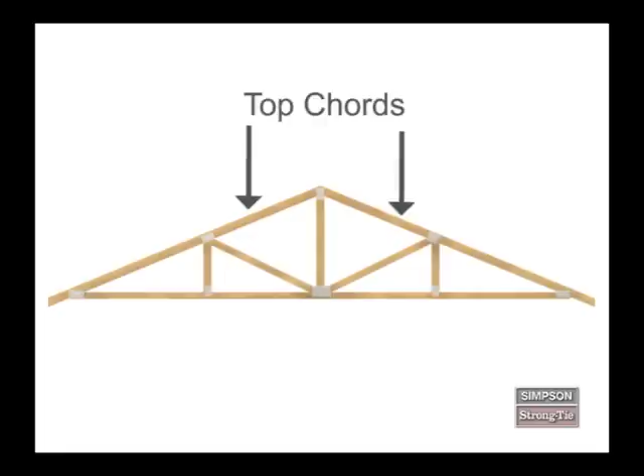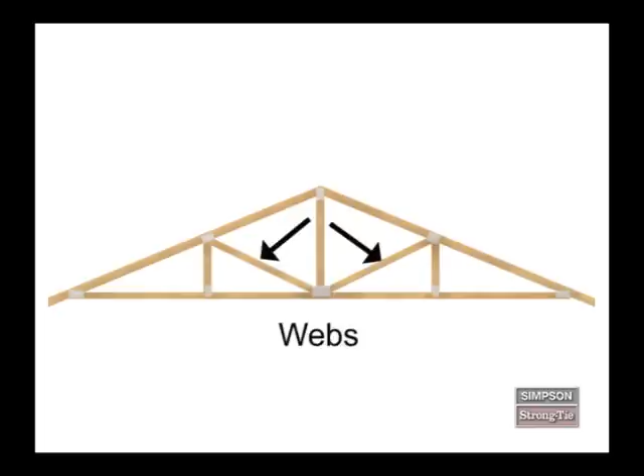A metal plate connected wood truss is an engineered pre-built component that functions as a structural support member in a house. Let's look at the parts that make up a truss. The primary parts of a truss are called chords and webs. Chords are the perimeter members of a truss. The top chord is an inclined or horizontal member that establishes the top of the truss. The bottom chord is an inclined or horizontal member that establishes the bottom of the truss. Webs are members that join top and bottom chords. Toothed metal connector plates tie a truss's webs to its chords.

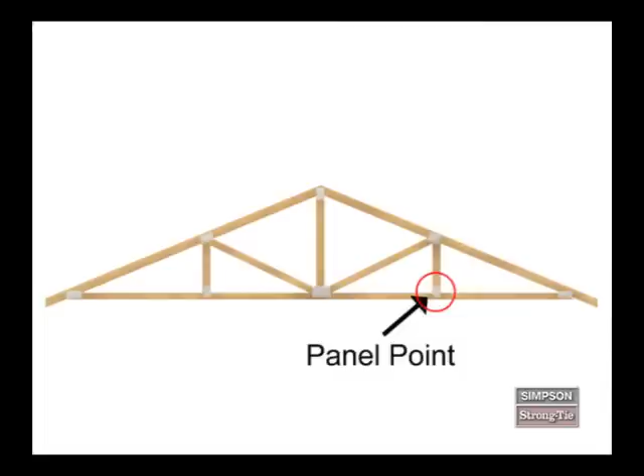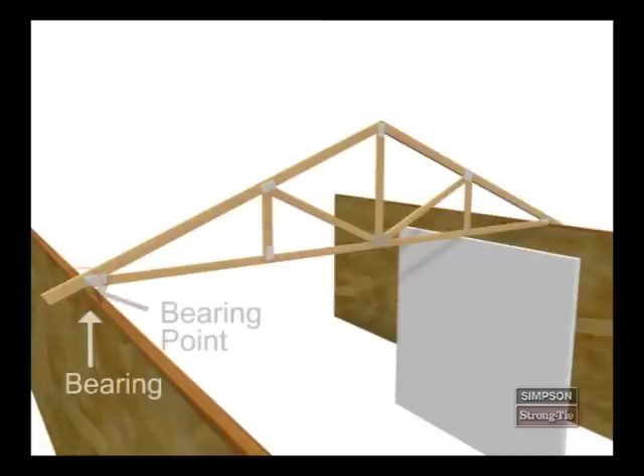There are different names to describe where truss members intersect. For example, the place where a web meets a chord is called a panel point. The place where a top chord intersects with a bottom chord is called a heel. A bearing is a load-bearing wall or beam that carries truss loads to the foundation of the structure. Where a truss intersects with a bearing is called a bearing point. Note that structures also have non-load-bearing walls, which are called partitions.

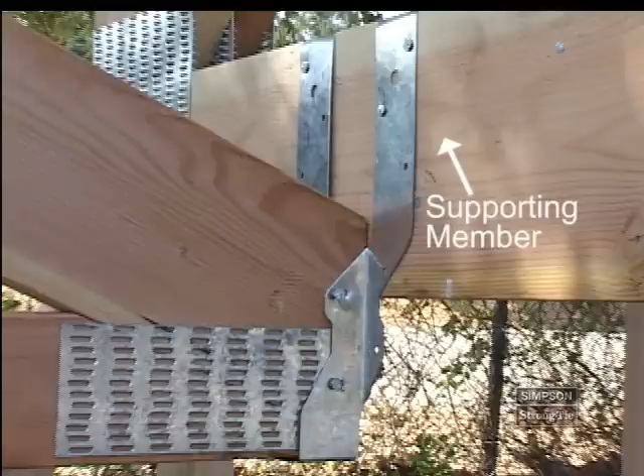There are two types of truss bracing, temporary and permanent. Temporary bracing holds trusses in plane until permanent bracing is put in place. Permanent bracing stabilizes trusses throughout the life of a structure. We will refer to truss members as either supporting or supported. A truss member with a hanger attached to it is a supporting member. A truss member that you install into a truss hanger is a supported member.

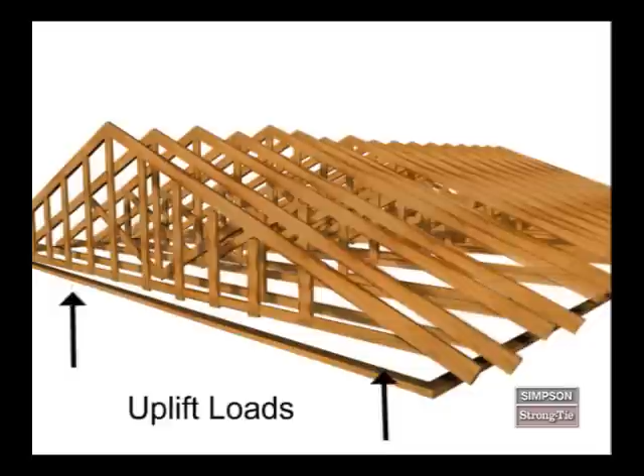Trusses are designed to resist many types of loads. Lateral loads are forces that push on a structure. Uplift loads are forces that try to lift the truss away from its bearing points. Now that you're familiar with basic truss terms, let's look at some common truss types.

A variety of truss types are used in construction all throughout the country to build floors and roofs. You should be able to identify the common trusses that we are about to review because it's important for correct product installations. A girder truss is usually made of multiple trusses, which are fastened together to act as one truss. A girder truss carries heavy loads from structural members that are framed into it.

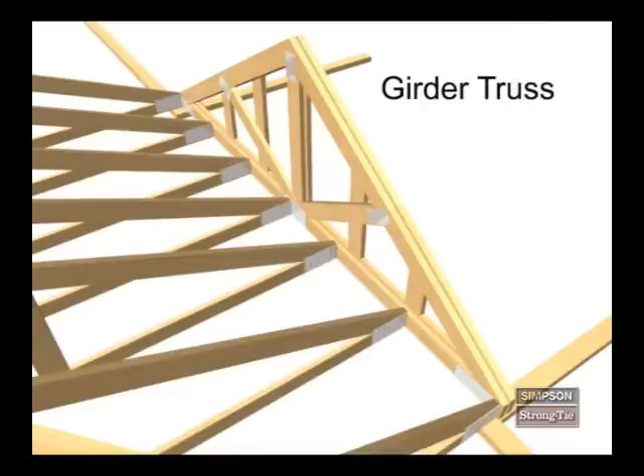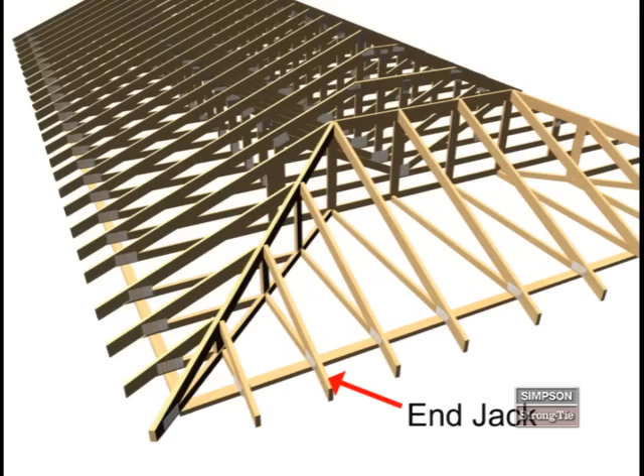In symmetrical hip-set roofs, a hip jack is installed at a 45-degree angle from the corner of a structure to the hip girder. I'll refer to the hip jack simply as the hip later on in the video. An end jack extends from the end of the building to the hip girder or hip jack. We will refer to the end jack as the jack later on in the video. A valley truss sits on top of other trusses. It's used in construction to change the direction of roof planes or to connect diverging roof planes.

A gable end has a triangular-shaped frame. It's used in construction to complete the end wall of a building and has vertical members that support the sheathing and resist wind. Now you're familiar with some common truss types that you may see as we learn how to install Simpson truss hangers.

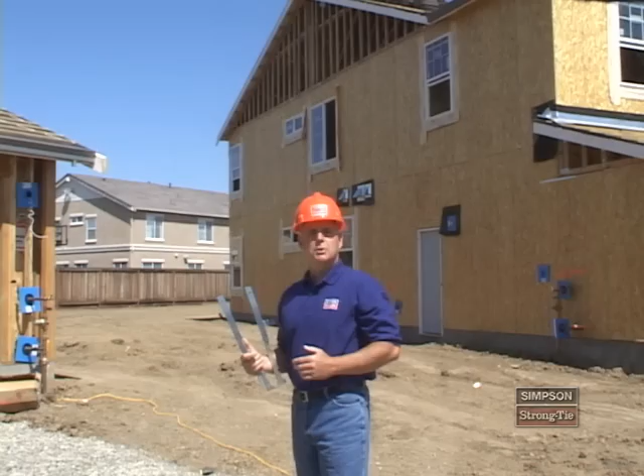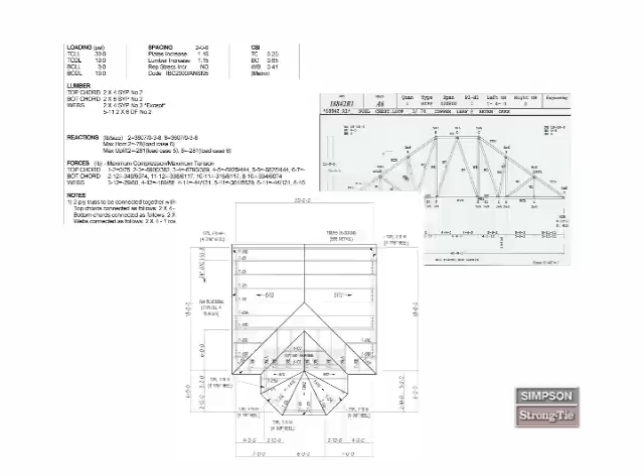It's an engineer's or truss designer's job to specify truss hangers, but it's your job to install the truss hangers that they specify correctly and in the right places. Before you begin installing any trusses, verify that all the specified hangers were delivered to the job site. Hanger specifications are usually located in one of three places: on a truss placement plan, in the structural design document's fastener schedule, or on the individual truss design drawings.

The erection of wood trusses is dangerous and requires careful and proper installation methods. The Building Component Safety Information booklet and summary sheets provide guidelines for the safe handling and installation of trusses and temporary bracing. Please take some time to become familiar with these resources. In just a few moments, I'll show you how to install Simpson Strong-Tie truss hangers. However, let's first look at the hangers themselves.

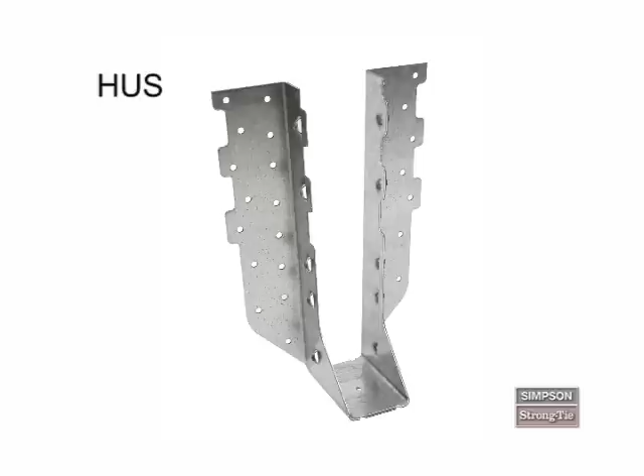The HUS is a face mount hanger that has the dome nailing feature to guide nails at a 45-degree angle. Like the HUS, the HTU is also a face mount, but it doesn't have dome nailing. It has straight nailing, but otherwise installs just like the HUS.

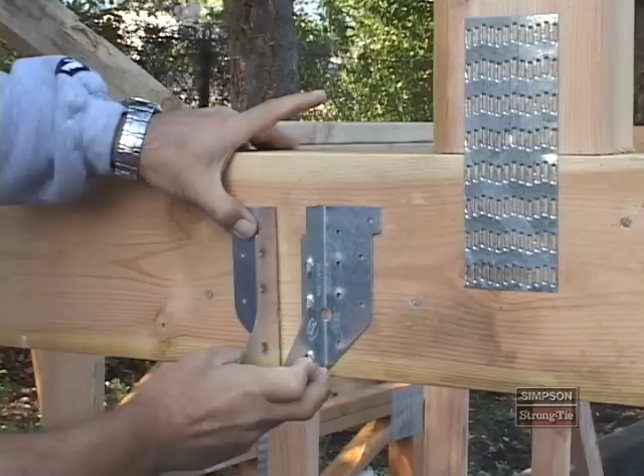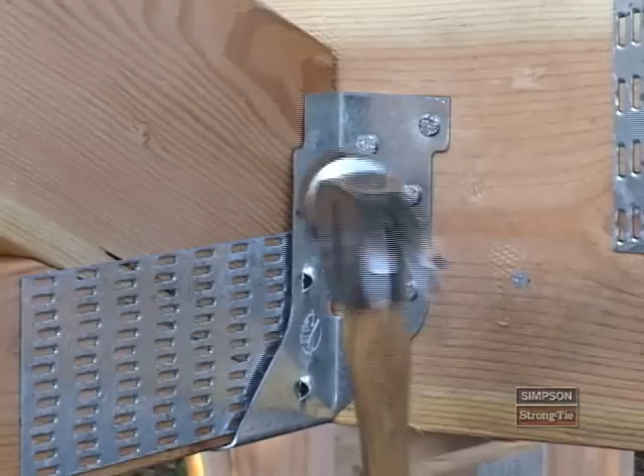To install, place the hanger on the supporting truss and install the required nails through the side flange nail holes into the supporting truss. Then, place the supported truss in the hanger and install the required nails through the domes so that they enter the supported truss at a 45-degree angle. This is what the HUS looks like when it's installed correctly.

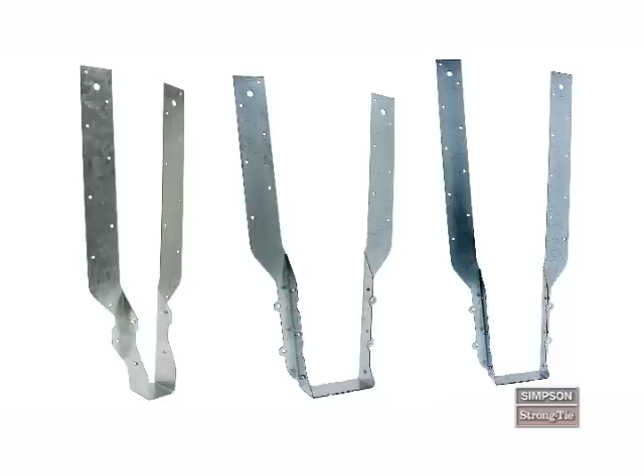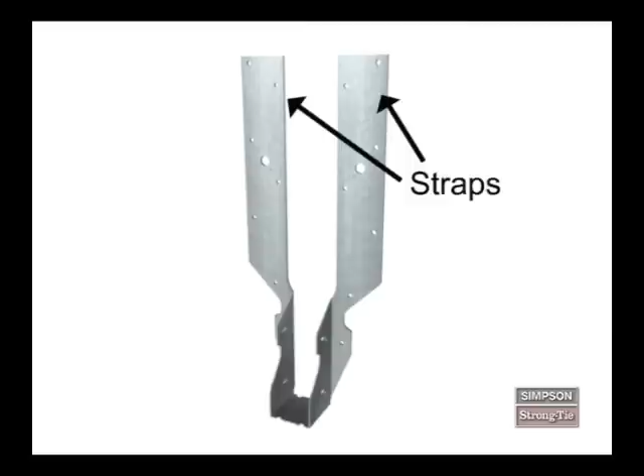Adjustable truss hangers have long straps, similar to the flanges on typical face mount and top flange hangers. These hangers are called adjustable because you can field form the straps to create top flanges, which will give you the installation benefits of a top flange hanger. All THA series hangers have straps and side plates. It's important for you to recognize these parts because I'll refer to them as I explain the installation processes. THA series hangers have two different installation methods: maximum and minimum nailing.

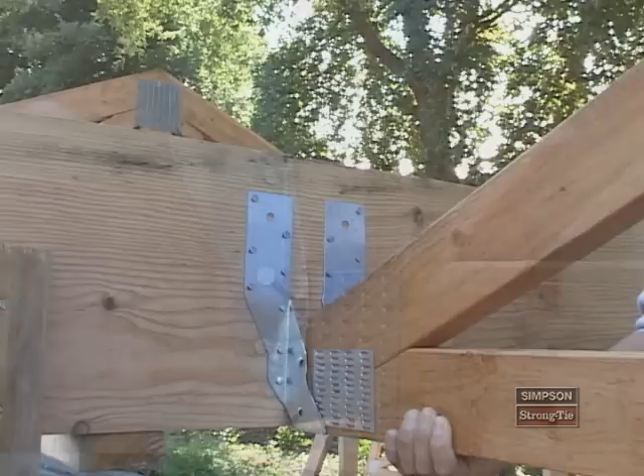The maximum nailing method is similar to the installation process for a typical face mount hanger. After you position the hanger, drive the appropriate nails through the strap nail holes and into the supporting member. Then place the truss in the hanger and drive the appropriate nails through the side plate nail holes and into the truss. Note that the side plate nail holes are designed for double shear nailing.

Therefore, you have to drive the nails at a 45-degree angle so that they go through the corner of the truss and into the supporting member. Take a moment to review this complete, correct installation.

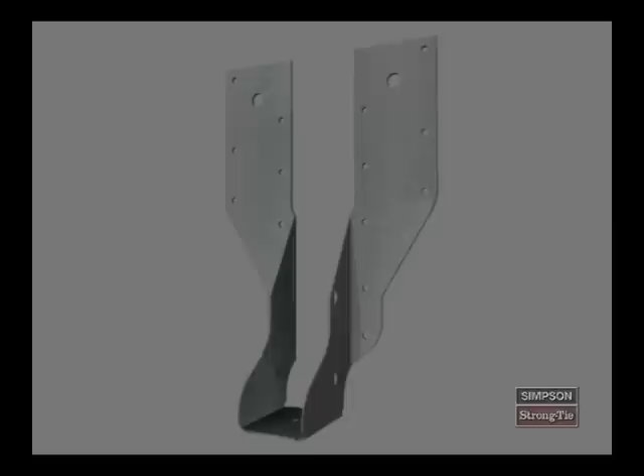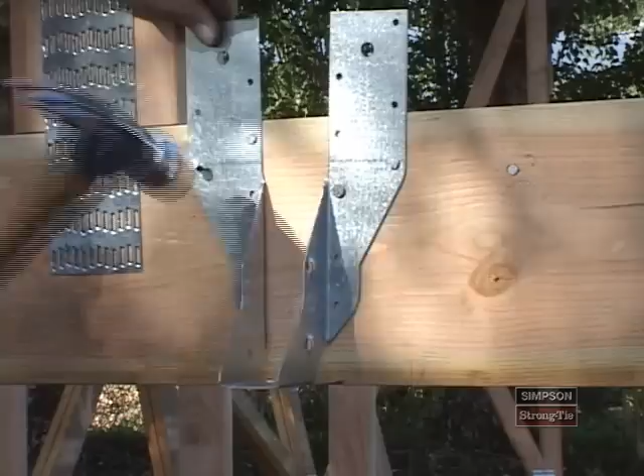Installation requires that you field form the straps over the supporting member. This makes the THA series hangers like a typical top flange hanger. Before you begin installing any THA series hanger using the minimum nailing method, you should know how many inches of strap must extend over the top of the supporting member. To secure the hanger, install at least 4 10D commons through the straps and into the face of the supporting member. Bend the straps over the top of the supporting member, then drive at least 2 10D commons through each strap and into the top of the supporting member.

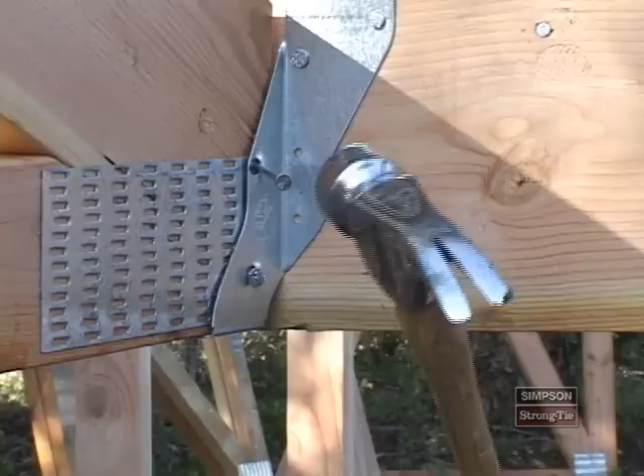The minimum nailing method for the THA-29 requires double shear nailing. You must drive 4 10D commons at an angle through the side plates so that they go through the truss and into the supporting member. Here is what a correct installation looks like.

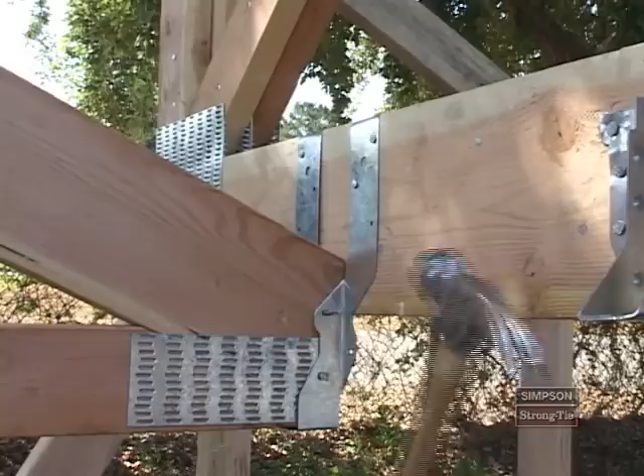Note that for all other THA models, the minimum nailing method doesn't require double shear nailing. When this is the case, you can easily straighten the double shear tabs and drive the nails straight into the truss. For single-ply trusses, use 4 10D by 1.5 nails. For 2-ply trusses, use 6 16D by 2.5 nails.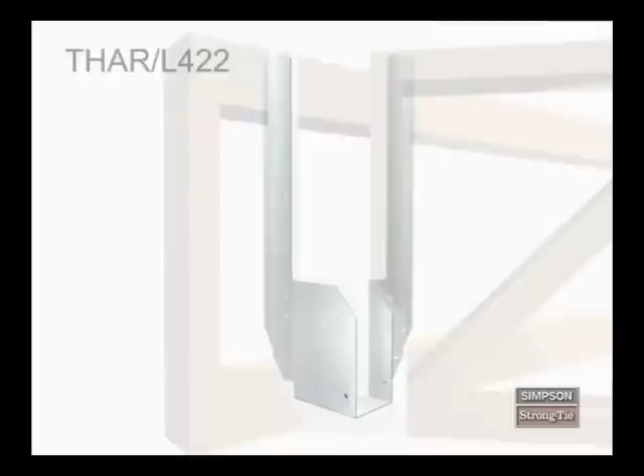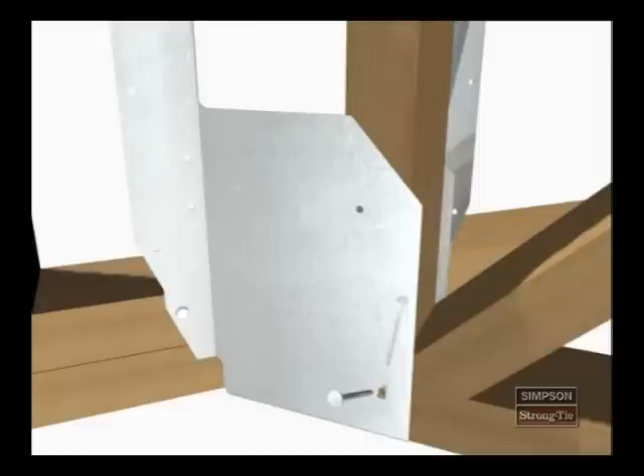The THAR/L 422 series of adjustable truss hangers is designed for the standard 45-degree floor truss installation. In both the maximum and minimum nailing configurations, you must field form the straps at least 2.5 inches over the supporting member. To finish this installation, drive 1 10D by 1.5 inch nail into each pan hole and 1 10D by 1.5 inch nail into the side plate.

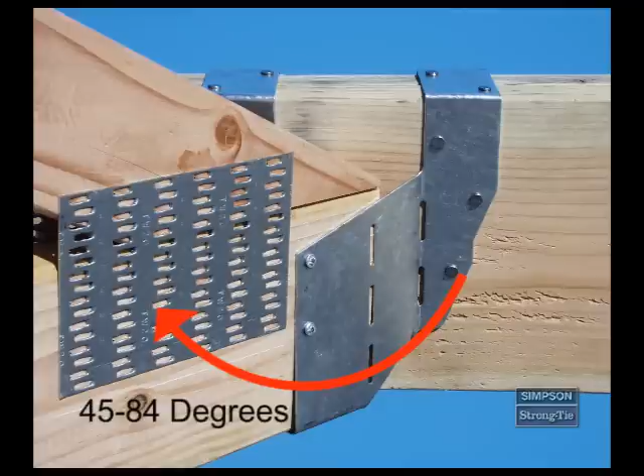The THASR/L series of adjustable hangers are designed to connect trusses that are severely skewed. These hangers can be field skewed between 45 and 84 degrees. There is a 4-step process for installing this product. Place the supported truss in the seat of the hanger. Align the back edge of the supported truss with the slotted holes in the side plates.

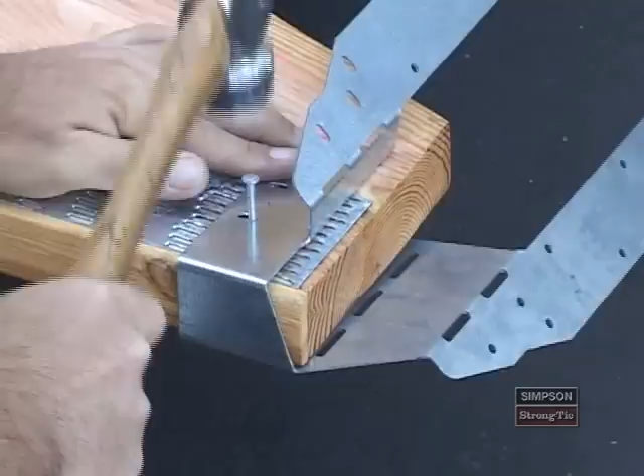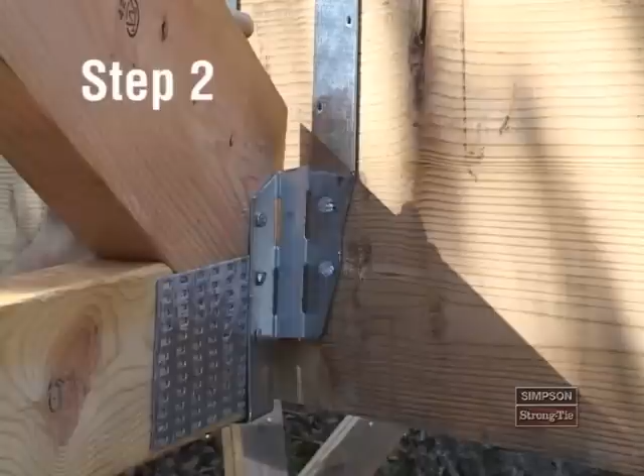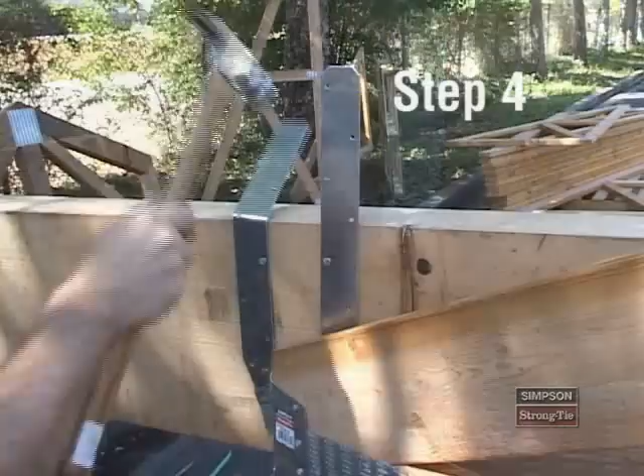Then drive 4 10D by 1.5 inch nails into the side plate nail holes to fasten the hanger to the truss. Install 10D nails into the header on the acute angle side of the hanger. Adjust the hanger to the desired angle. Bend the obtuse side of the hanger flush with the supporting member and install the face nails. Bend the strap over the top and install the rest of the required nails. Here's what a correct, complete installation looks like.

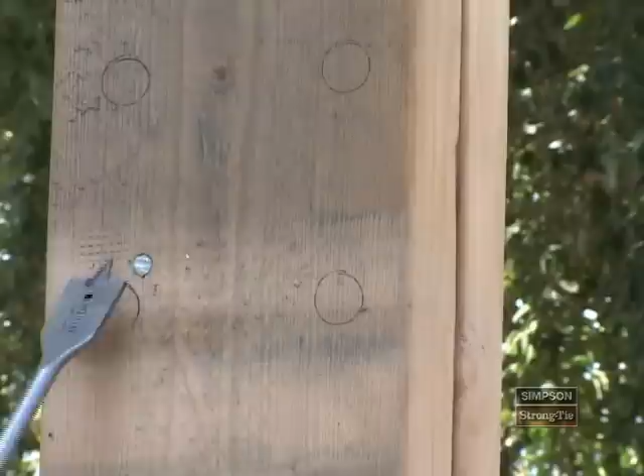Heavy truss hangers, part of the THG series, connect the supported truss to a vertical member of the supporting truss with bolts or SDS screws. To install a THG series hanger, place the hanger into position and mark the machine bolt locations, then drill the bolt holes. When bolts are required in the supported member for additional uplift, drill the holes using the same process that we just covered. Secure the THG to the supporting member using the bolts.

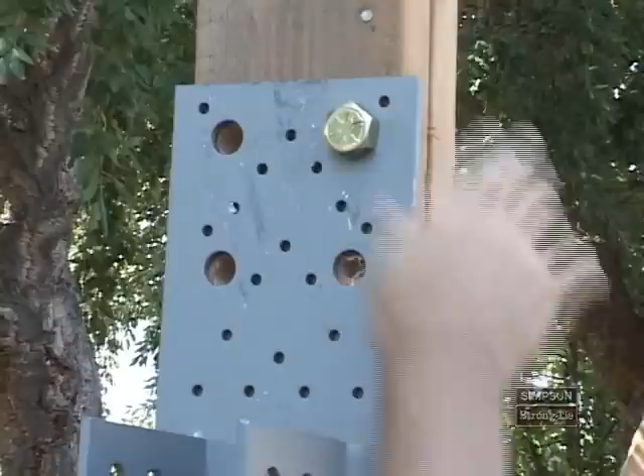Then place the supported truss in the hanger seat and install 10D commons through the side plate nail holes and into the supported truss. Take a moment to review this correct THG installation. Now let's complete this section on truss hanger installation by learning how to install multiple truss hangers.

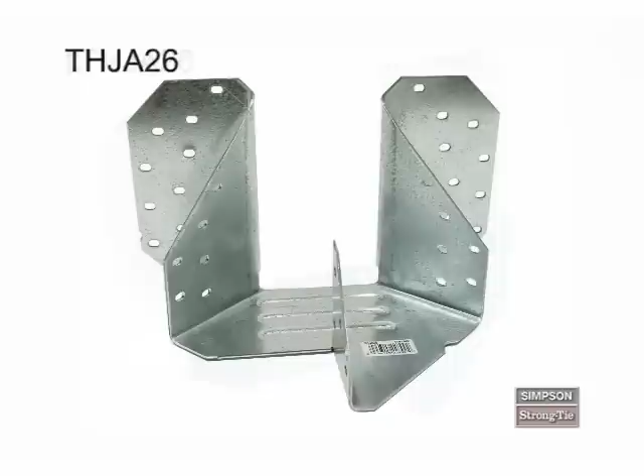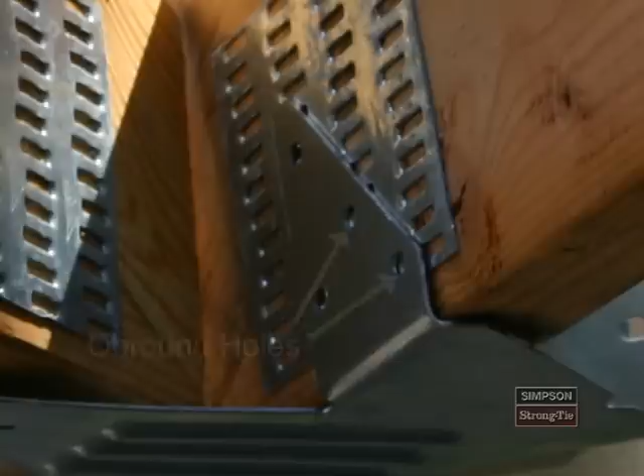Multiple truss hangers connect hips and/or jacks to girder trusses. Two common multiple member truss hangers are the LTHJA26 and the THJA26. Let's look at how to install the LTHJA26. The LTHJA26 has oblong or oval-shaped nail holes. Oblong holes make installation easier because you can drive nails through them at an angle.

The LTHJA26 series hangers have fastener holes located in the seat of the hanger and require installation of fasteners into the bottom of the hip members. To install, first position it on the supporting member. Then install 20 10D common nails into the face of the supporting member.

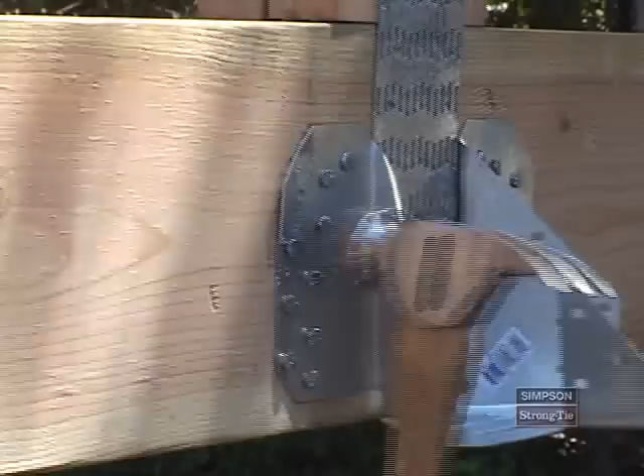Place 2 hips or a hip and jack into the LTHJA26 and fill all the nail holes with 10D by 1.5 inch nails. To finish this installation, install 1 10D by 1.5 inch nail through the seat of the hanger and into the bottom of the hip member. While correct hanger installation is critical to overall truss installation, bracing is equally important. Let's look now at bracing products and installation.

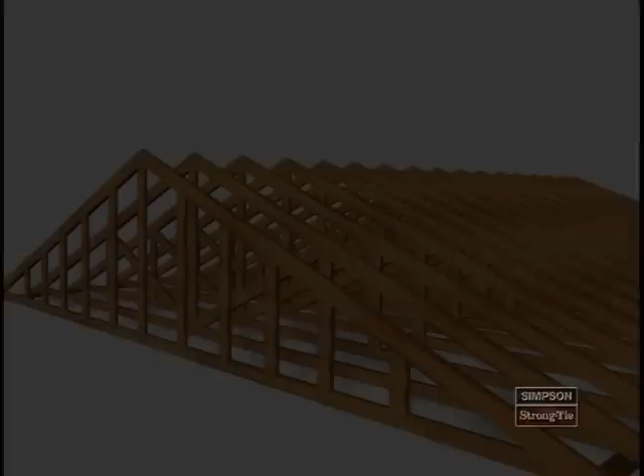When erecting trusses, temporary and permanent lateral and diagonal bracing is required. It is a building designer's or designer of record's responsibility to provide a permanent bracing plan. Lateral bracing is installed at right angles to chords and web members to provide stability, to help a truss resist lateral movement, and to prevent trusses from leaning and causing the domino effect. Bracing also prevents a truss from bending out of plane.

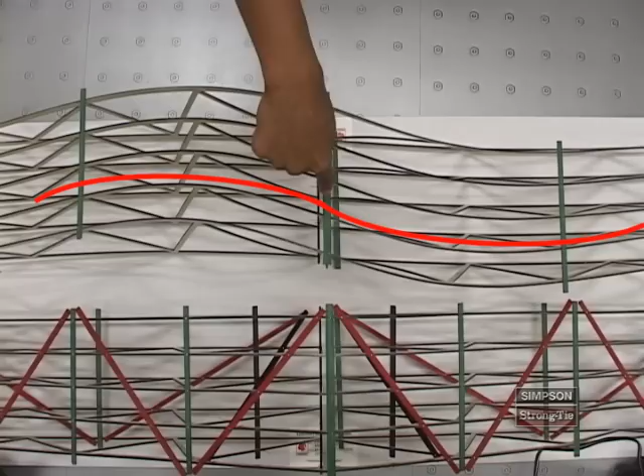The typical S-bend is a warning sign that trusses aren't properly braced. Even trusses that have lateral bracing can buckle in an S shape if there's no diagonal bracing. Therefore, lateral bracing requires additional stability from diagonal bracing. Now let's look at how to install two of Simpson Strong-Tie's bracing products, the TSB2-24 and the TBD20. Used properly, these products meet the requirements of BCSI for bracing trusses.

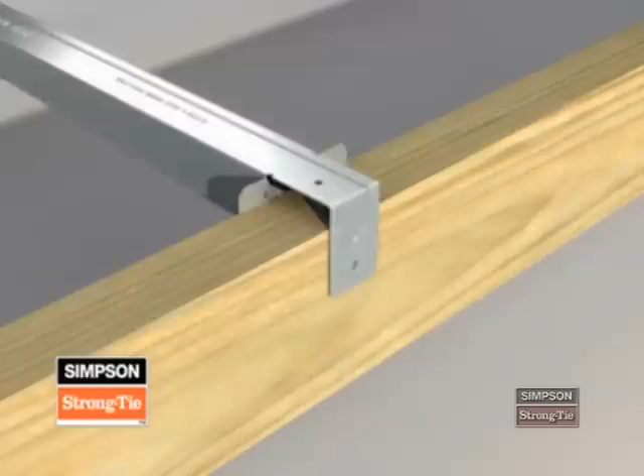You can use the TSB2-24 as lateral bracing for top chords, bottom chords, and web members. To install the TSB2, you will use only 10D by 1.5 inch nails. Start the installation by placing the brace on the top of the top chord or bottom chord. Next, secure the bracing by driving 2 nails through the 2 nail holes at each end of the brace.

If web members require permanent lateral bracing, the truss design drawings will indicate which webs to brace. Note that you can install the TSB on either side of the web members. Here's what the TSB2-24 looks like when it's correctly installed. Note that you don't need to remove the TSB2-24 before you install the permanent sheathing diaphragm. Its profile is low enough that you can sheathe over it.

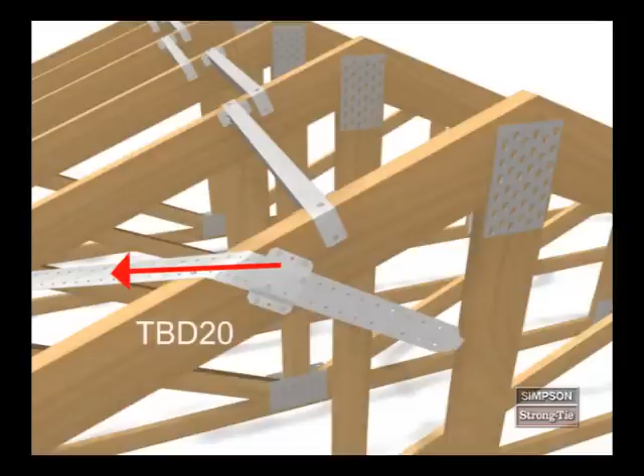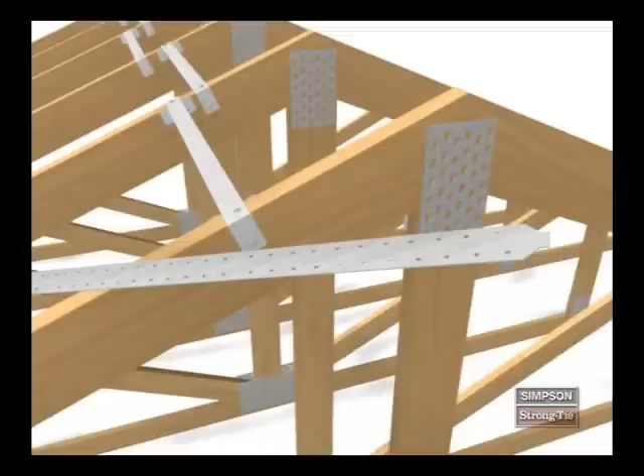The TBD-20 is a diagonal brace that safely transfers loads from the TSBs to the supporting structure. Note that the TBD-20 installation requires that you use only 10D by 1.5 inch nails. The TBD-20 is installed on a row of 5 trusses. To begin installation, determine where to secure the TBD-20 on the first truss. Hold one end of the strap next to a TSB on the top chord.

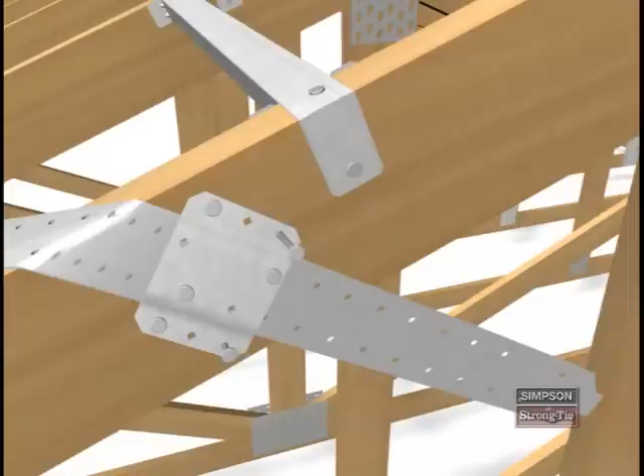Ensure that the strap is tight, and then install one nail through the bracing and into the top of each truss. Then insert one end of the strap through the clip. Secure it by installing 2 nails through the interior clip section and into the chord. Next, install a second strap clip on the side of the last truss using 4 nails in the exterior clip section, and secure it with 2 nails in the interior clip section. This completes the installation for a single brace.

You install the TBD-20 in an X configuration between parallel rows of TSB2-24s. Therefore, repeat the installation process in the opposite direction to form an X. Like the TSB, the TBD-20 has a low profile, so you don't have to remove it before applying the sheathing. This is what the TBD-20 looks like when it's installed. Now let's discuss some truss uplift connectors.

Uplift connectors resist forces that try to lift a truss away from its bearing points. Let's take a look at some of the Simpson uplift connectors and how to install them.

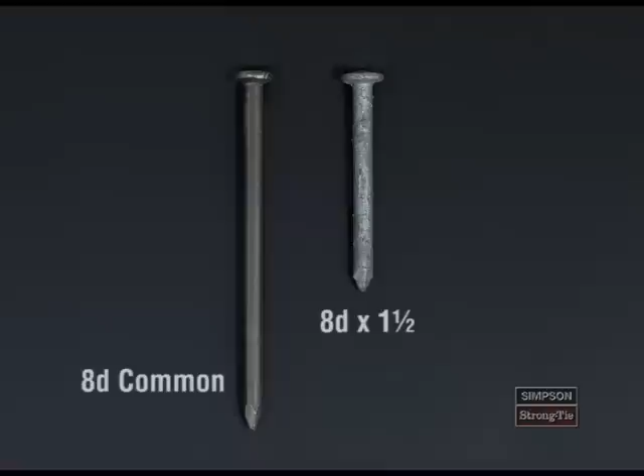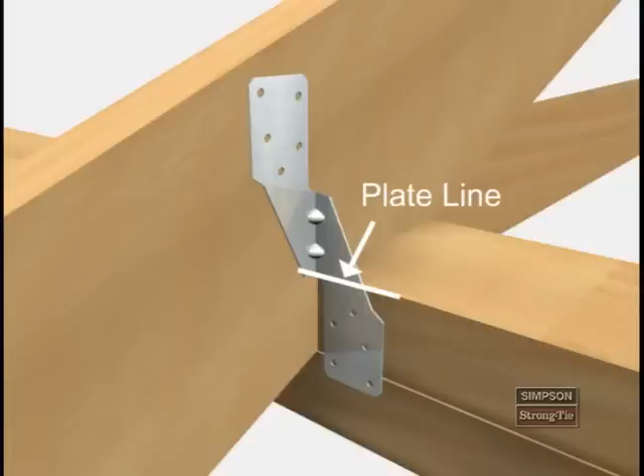The H2.5A is a symmetrical uplift connector. This series of truss connectors attaches to the sides of the truss. The H2.5A installation requires either 8d common or 8d x 1.5 inch nails. To install, align the plate line on the H2.5A with the top of the top plate. Secure the H2.5A by driving 5 nails into the top plate and 5 nails into the truss.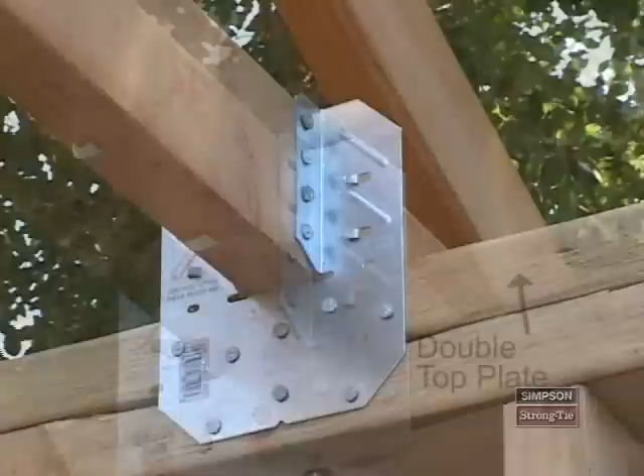The H10 and H14 series truss connectors encapsulate the truss much like a joist hanger. The H10 installation requires that you drive eight 8d x 1.5 inch nails into the plates and another eight 8d x 1.5 inch nails into the truss. You can install the H14 either to a double top plate or to a double 2x header.

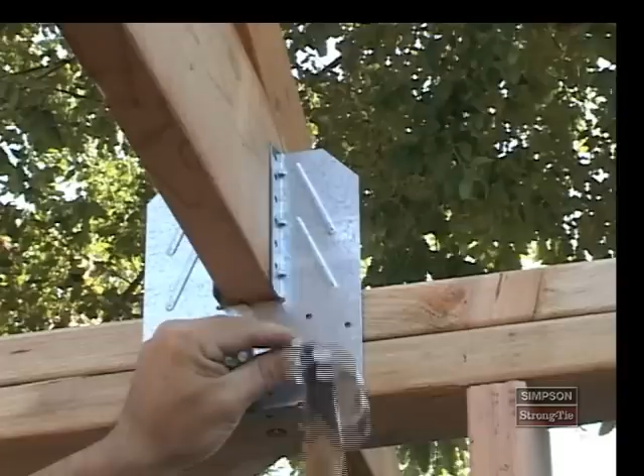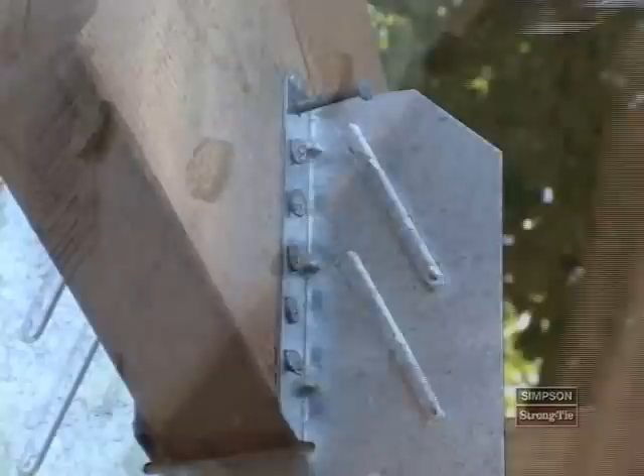To install the H14 to a double top plate, position the bottom flange tightly against the bottom of the double top plate. Then install twelve 8d common nails through the face of the H14 and into the double top plate. You must also drive one 8d common nail into the bottom flange. Finish the installation by driving twelve 8d x 1.5 inch nails into the truss.

To install the H14 to a double 2x header, first straighten the bottom flange. Then align the seat with the top of the 2x header. Next install the H14 by nailing fifteen 8d common nails into the header and another twelve 8d x 1.5 inch nails into the truss.

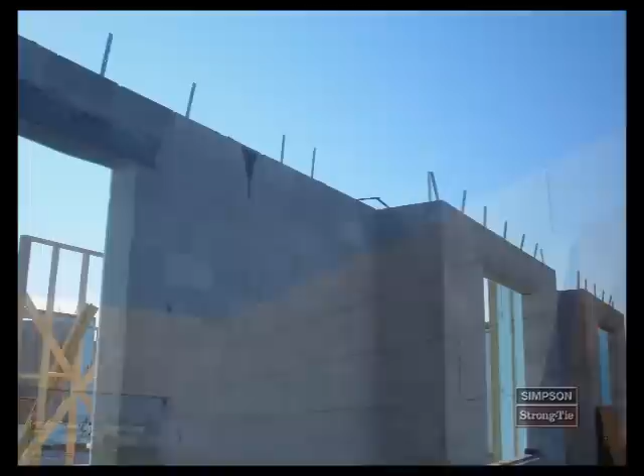If your walls are constructed using concrete or CMU material, embedded truss anchors like the META20 provide a simple solution for the difficult wood-to-masonry connection. After the grout is placed in the cells, insert the hook of the META20 into the grout until the embedment line makes contact with the grout.

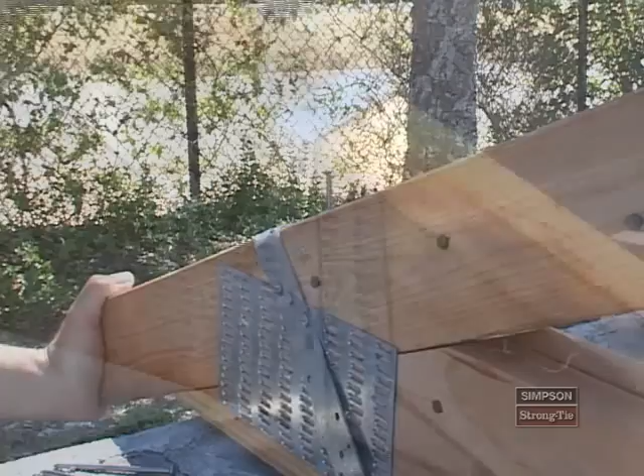After the grout is cured and the trusses are in position, bend the strap up and over the top of the truss if necessary. Ensure that the strap is tight against the top and sides of the truss. Then install the required nails into the single-ply truss. For multiple-ply trusses, note that you would use 16d common nails.

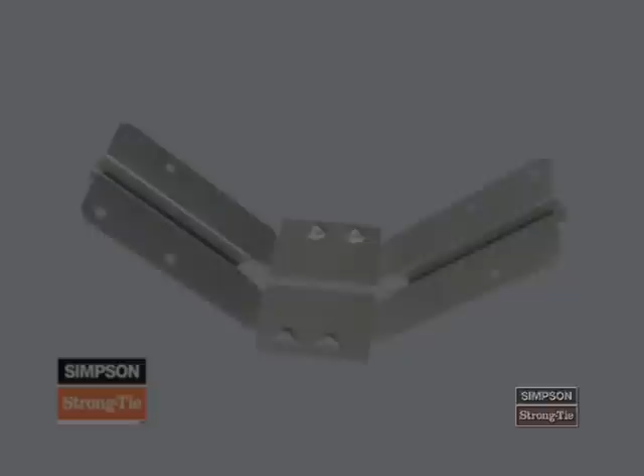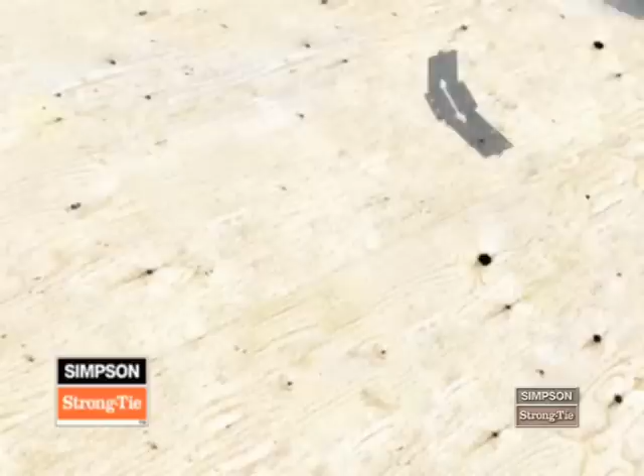Valley trusses sit on the sloped surface of other trusses, which can make connecting them difficult. The VTC2 makes this connection easier and resists uplift. You install the VTC2 on top of roof sheathing in accordance with the following three-step process. First, align the center line of the VTC2 with the truss top chord. Then install the VTC2 using four 10d common nails.

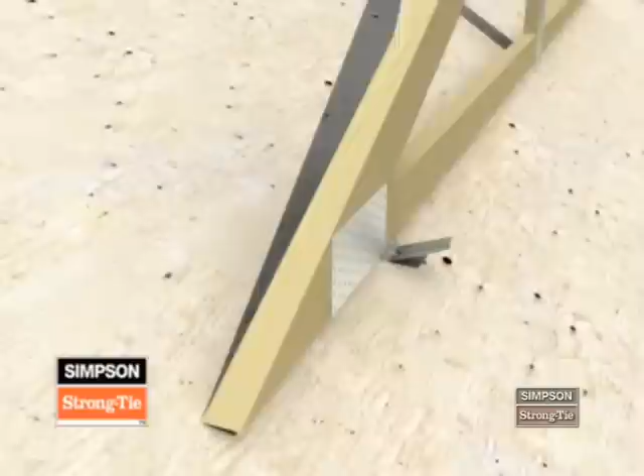Next, adjust the upslope stirrup vertically and attach the VTC2 to the bottom chord of the valley truss using 10d x 1½ inch nails. Then, to finish the installation, adjust the downslope stirrup vertically and attach it to the bottom chord with 10d x 1.5 inch nails. Look at the correctly installed VTC2. Now let's discuss some other connectors that were designed for special applications.

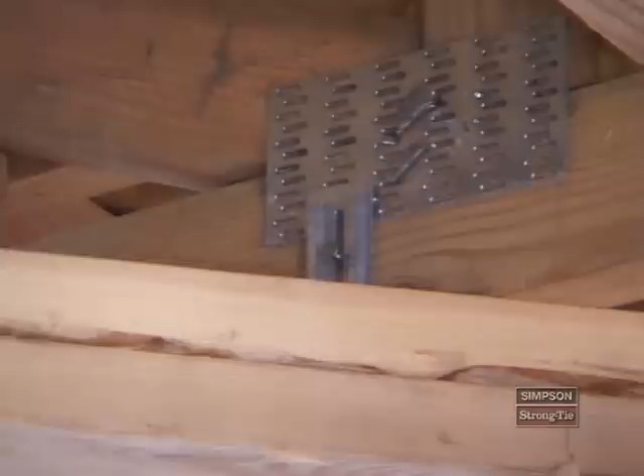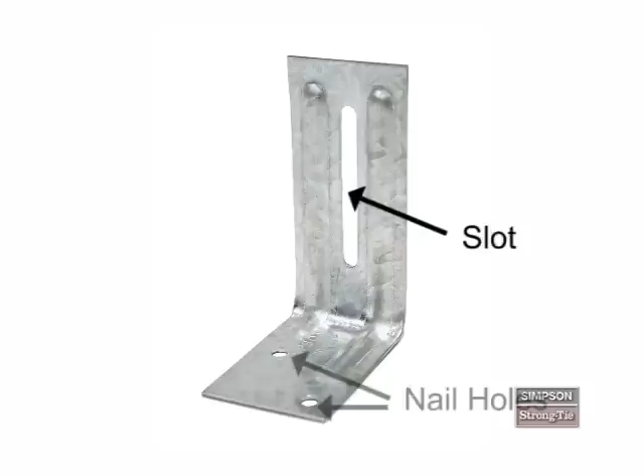Some types of connections in the field can be challenging or time-consuming. The STC simplifies the process and provides an improved connection where a roof truss spans over a partition wall. A truss should never be nailed directly to an interior partition wall unless the building plans call for it. The STC supports the top of a non-load-bearing wall while allowing vertical movement of the truss chord. Notice the slot and the nail holes, which you should be familiar with for correct installation.

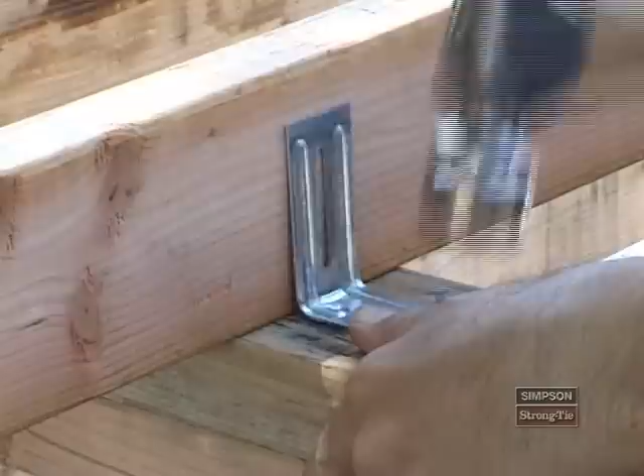To install the STC, first place it on the top plate. Position it next to the truss. Then install two 8d common nails into the top plate. Next, install one 8d common nail through the slot in the STC and into the truss. Install this nail in the middle of the slot. Don't seat the nail head. There should be a gap between the nail head and the STC. This gap will allow the truss some movement. This is what the STC looks like when it's installed correctly.

Now, let's review what we've learned. You're now familiar with the basic terms associated with trusses. You can also identify some common trusses and correctly install a variety of Simpson Strong-Tie truss hangers and bracing products.